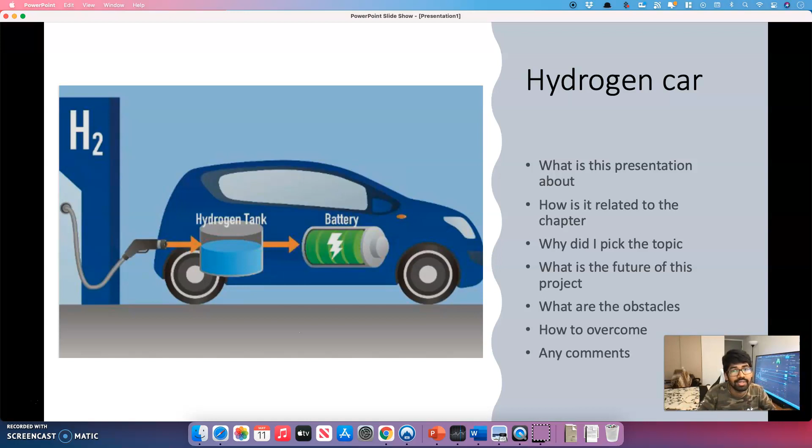So what exactly is green hydrogen? Well, green hydrogen is an alternative fuel generated with clean energy, an energy source that could help bring the world to net zero emissions in the coming decades. This is inexhaustible energy with low emissions using renewable electricity like wind turbines and solar panels, offering a promising road to cutting emissions at a manageable price. In addition, this environmentally friendly fuel is a non-toxic, colorless and odorless gas.

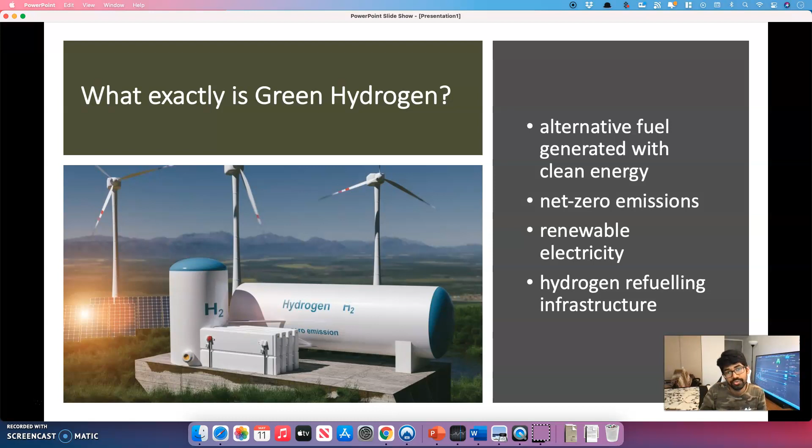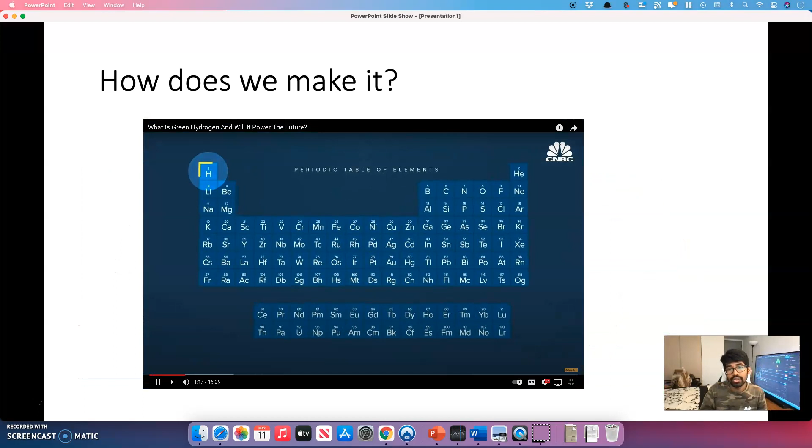Also, it has the highest energy density by mass among conventional fuels, and crucially, hydrogen refueling infrastructure is comparable to that used for conventional road fuels. So how do we make it? Because hydrogen is super reactive, it is not found freely in nature. It only exists combined with other elements. For example, water is a combination of 2 hydrogen atoms and 1 oxygen atom. So to get hydrogen, we must extract it from naturally occurring compounds like water.

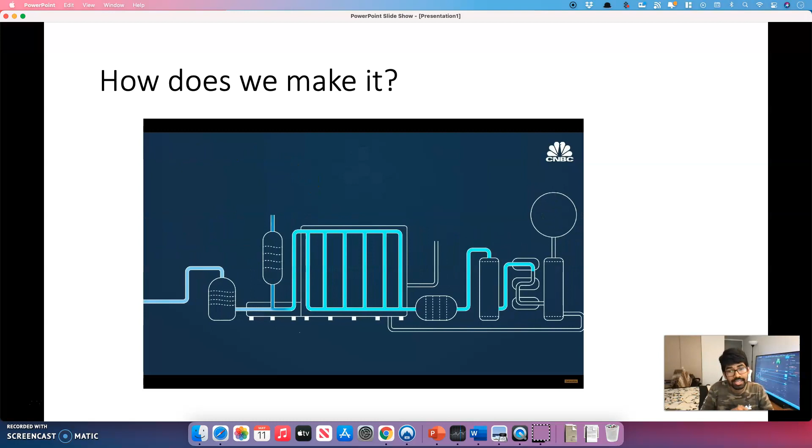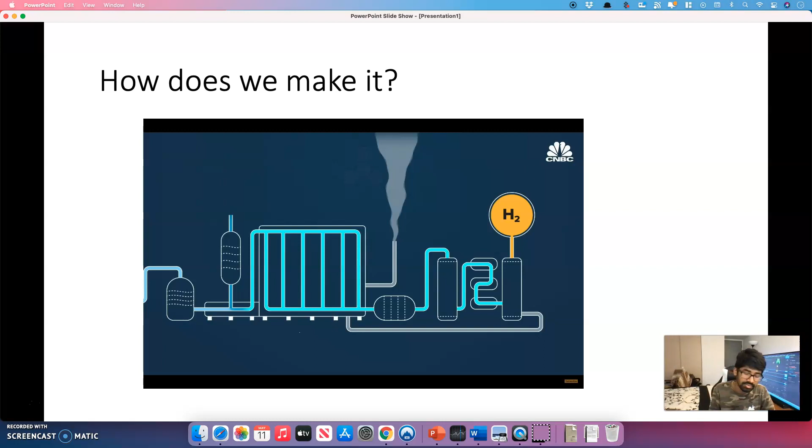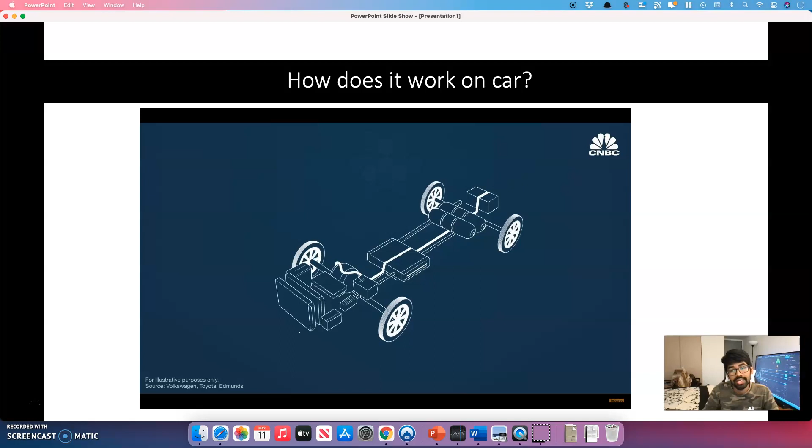It's an energy intensive process, and though hydrogen itself is a clean molecule, the hydrogen produced in the US today is extracted from fossil fuels, and it's a very pollution heavy process. Then in the next slide we can see how it works in the car. Well, that's quite interesting. Because hydrogen is an energy carrier and not an energy source itself, hydrogen fuel must be transformed into electricity by a device called a fuel cell stack before it can be used to power a car. Inside each individual fuel cell, the process looks something like this.

Hydrogen drawn from an onboard pressurized tank reacts with the catalyst. Most often this catalyst is made from expensive platinum, and as the hydrogen passes through the catalyst, it is stripped of its electrons, which are forced to move along an external circuit and consequently produce an electrical current. This electrical current is then used by the electric motor to power the car, creating only water as a byproduct.

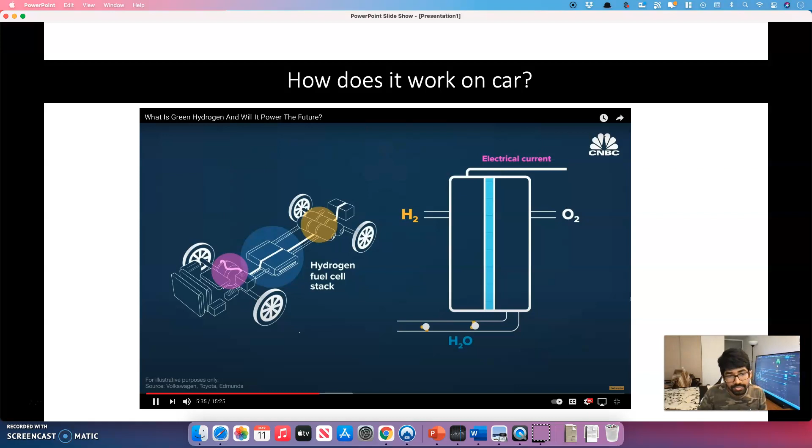Then how is this different from an electric car? Well, there are some similarities, not only differences. It's also emission free and has no engine sounds like electric cars, but the main disadvantage of electric cars is that they take way longer, sometimes half an hour to 1 hour at least, and at home it can take up to 6 hours to a day to charge. Also, electric cars with the battery cannot run more than 300 kilometers, but hydrogen cars can go up to 600 kilometers.

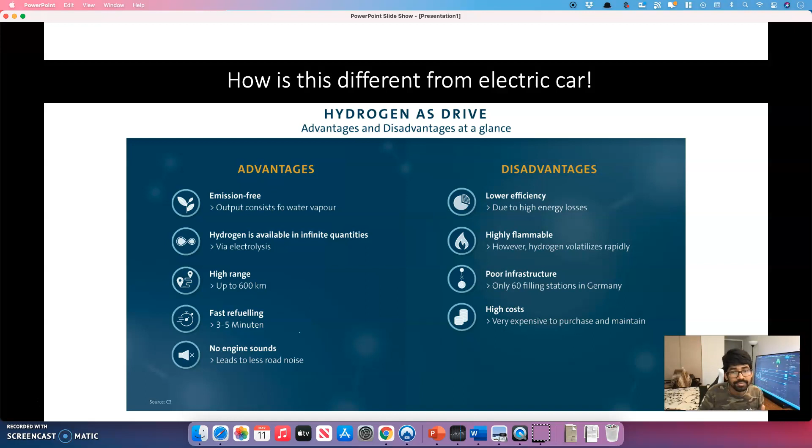And also we cannot make an enormous amount of electricity within a short time, but if we have the facility to make hydrogen from seawater, as you know the earth is 70% water, we can make infinite hydrogen energy, which can power many other things other than cars in the future. Some of the other disadvantages are lower efficiency due to high energy losses, it is highly flammable at times, the infrastructure in the US is not great yet, and the cost of hydrogen is quite expensive. I will go into that detail in a little while.

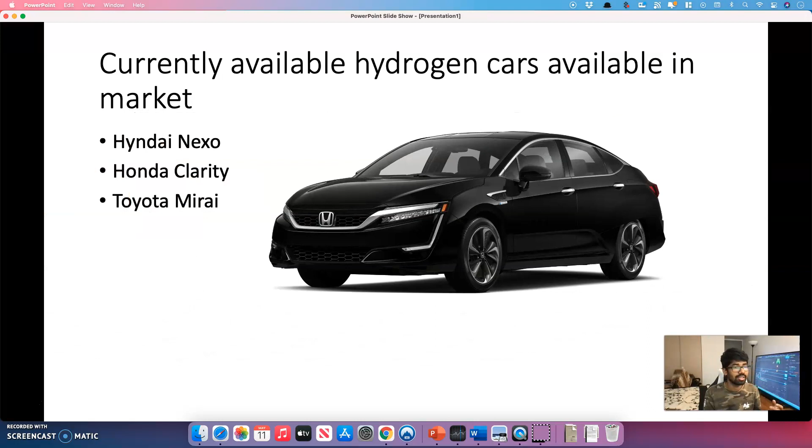So what cars are available right now in the market? Available for buying is the Hyundai Nexo. The next car is from Honda, known as the Honda Clarity, and the next one available is from Toyota, known as the Toyota Mirai.

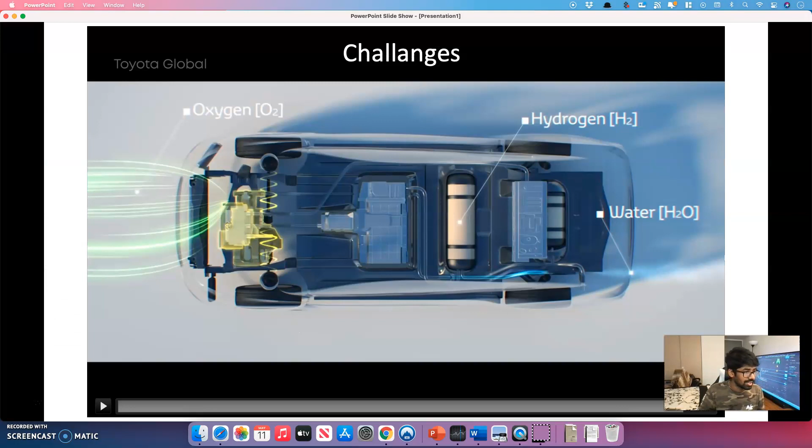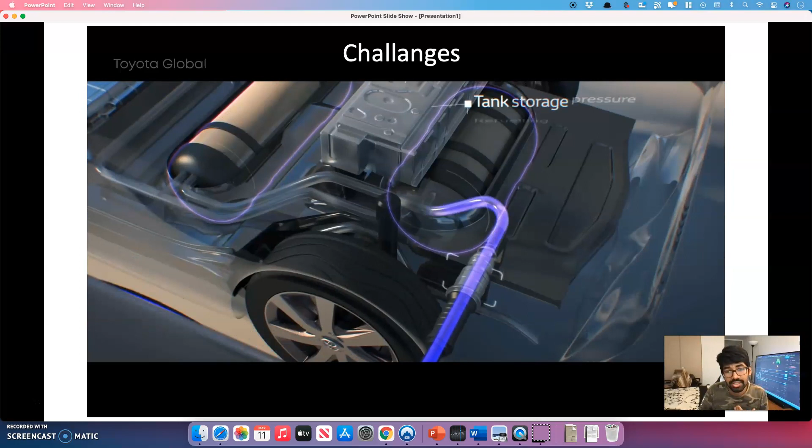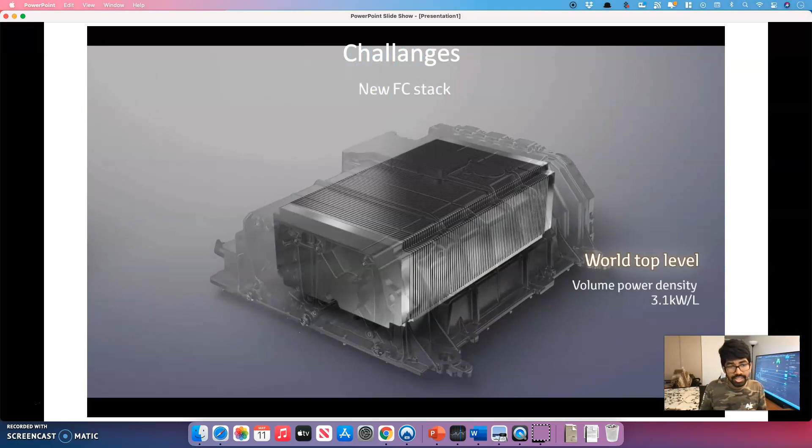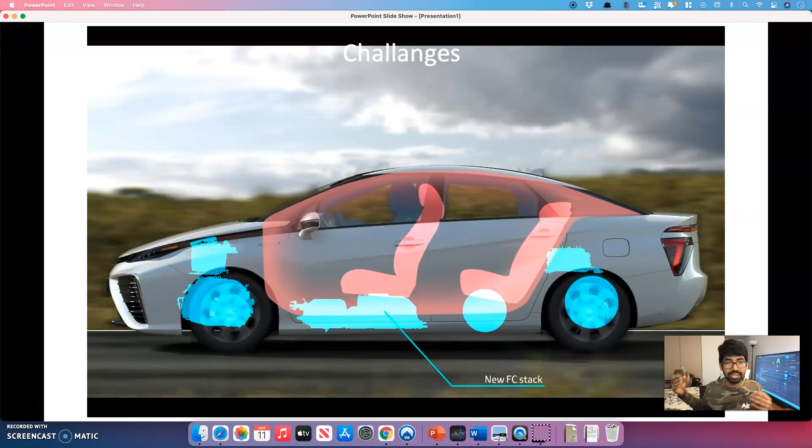Then the challenges. There are a few challenges that I would like to highlight here. There are not enough hydrogen stations. Only 39 publicly available hydrogen stations for fuel cell electric vehicles in the United States: 35 in California, 2 in South Carolina, and 2 in the Northeast, and another 29 public stations in California and 5 in the Northeast are planned. The costs are quite expensive for this car. This car runs about 60K, whereas regular electric cars are only 30K.

So in conclusion, I would like to say reduce the fuel cost per mile. It takes a whopping $90 to refuel hydrogen, whereas regular gas is $30 and EVs are $15 or $20. So that's a big no-no for hydrogen cars. The next one is improving energy security. Then we have to enable business continuity. Many people are not eager to spend their money on this business because they are not sure what the future is, and also provide more stability facing fossil fuel price fluctuations.